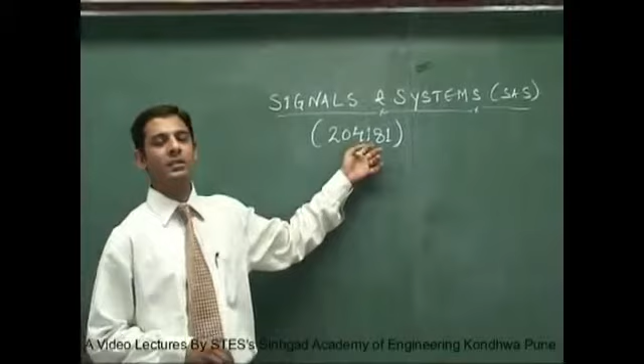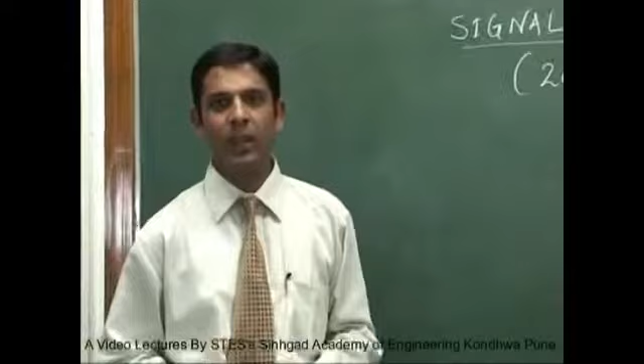This is one of the prominent subjects of second year engineering at Pune University, especially for the Electronics and Telecommunication branch. As you might know, the subject carries 100 marks, and at the end of the semester there is an oral exam worth 50 marks. So altogether the weight of the subject is around 150 marks.

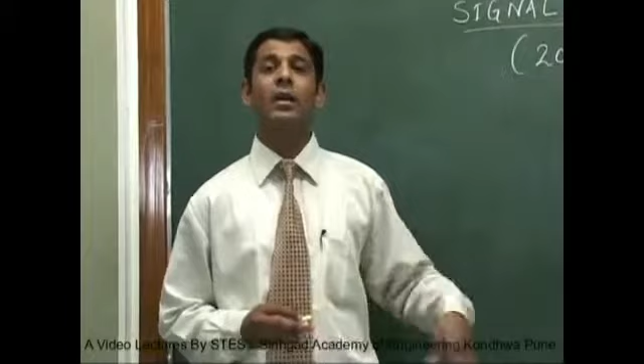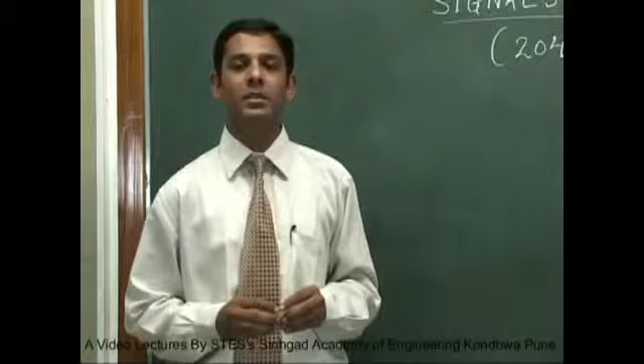This forms one of the very core subjects of electronics engineering because it involves all the concepts of electronics plus telecommunication engineering, where we deal with signals and how to process them. Subjects like Signals and Systems, Digital Signal Processing, Digital Communication, Advanced Digital Signal Processing and Image Processing are all in one queue, and for all these subjects, Signals and Systems forms the core basic subject.

As with every subject, this subject comprises 6 units, and I'll be discussing all these units in due course of time. Today I'll be providing you an overview of Unit 1, and since Unit 1 comprises around 4 chapters, we'll try to cover one chapter in brief.

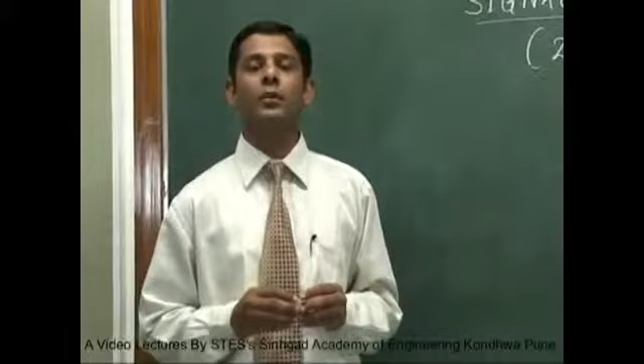Before starting, let me tell you some books which will be helpful for this subject. The first book is Signals and Systems by Simon Haykin, published by John Wiley. This is one of the Bible books for Signals and Systems. I mostly recommend this book to students, and almost 3 to 4 units of our syllabus are set from this book. You can always refer to this book, and most of the unsolved questions from it we'll try to solve in this video series. Mostly the question paper is also set from this book.

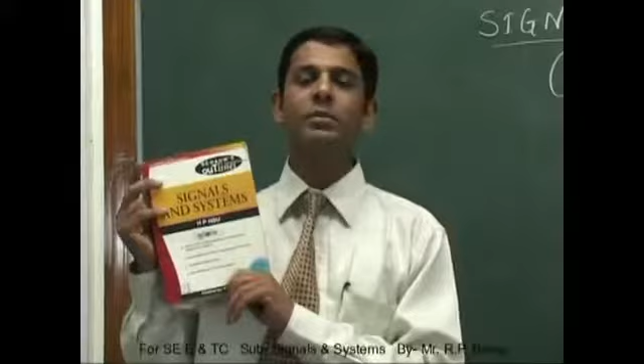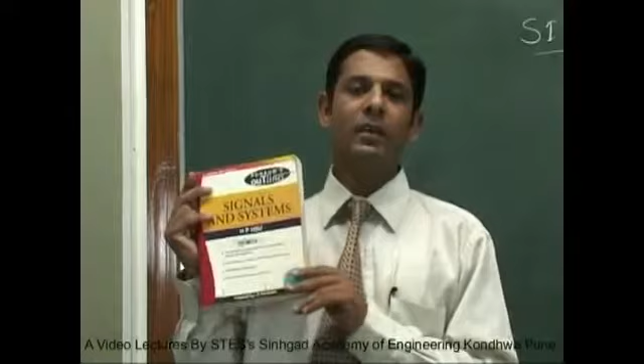Another book I'd recommend is Signals and Systems by M.J. Roberts, given by Tata McGraw-Hill, but I think it might be a little difficult for a normal student to digest. As an alternative, I'd suggest one more book, Signals and Systems by H.P. Hsu, from the Schaum's Series publications by McGraw-Hill. The importance of this book is that it has so many solved numericals widely required by second year engineering students to understand concepts, which they can practice, and which will be helpful in exams.

So 2 books will be very sufficient for the student: first, Signals and Systems by Simon Haykin, and second, Signals and Systems by H.P. Hsu from Schaum's Series. This Schaum's Series publication is very famous, not only for Signals and Systems but you'll find it even for other subjects like SSDC, DSP, or even Control Systems. For so many mathematical subjects, Schaum's Series is a title known not just for electronics engineering but for other branches of engineering too, dedicated to solving numericals for a particular subject.

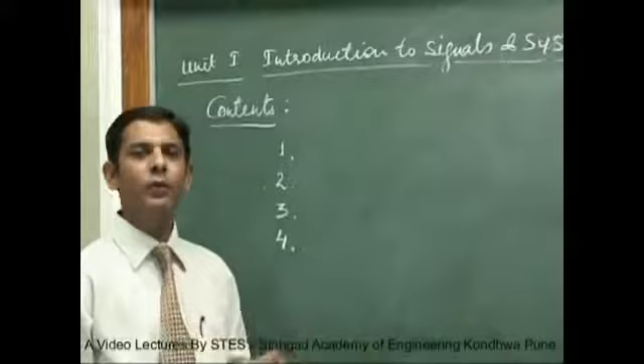As I was telling you, today we shall get an overview of Unit 1 and try to complete one of its chapters. The name of the first unit is Introduction to Signals and Systems, and it basically comprises 4 chapters.

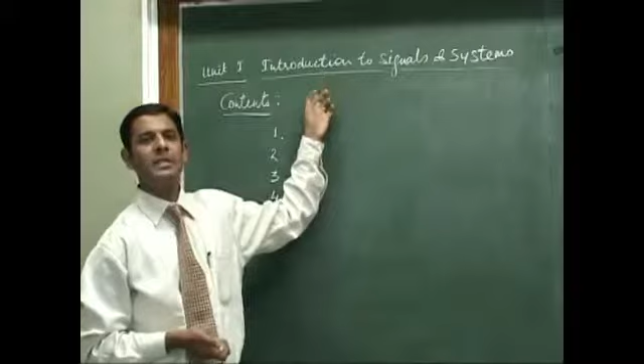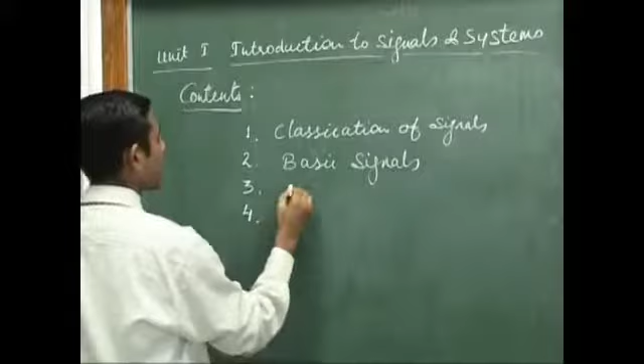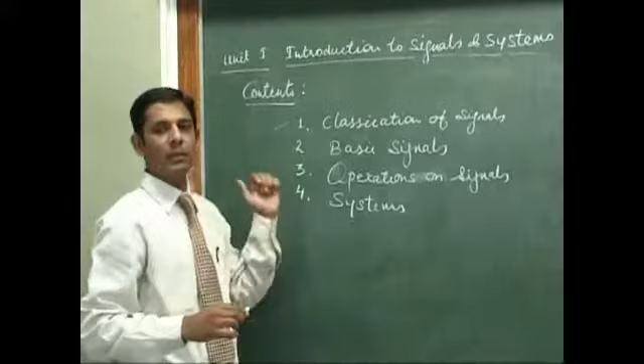So that will be the contents of Unit 1. What are the 4 chapters? Classification of signals, basic signals, operations on signals, and systems. Today I shall try to cover this chapter and give an overview of the other chapters also. Let me discuss each of these chapters in detail.

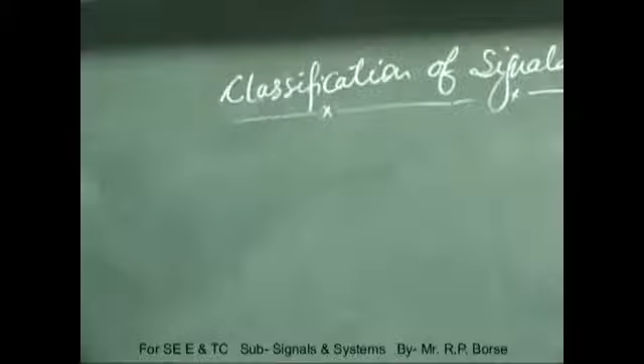So why is classification of signal most important? Because we want to know the characteristics of the signal. Many times the behavior of the signal depends upon its characteristics. So we are classifying different signals based on their characteristics, to know which signal fits into which category. That is the main motto of classifying signals.

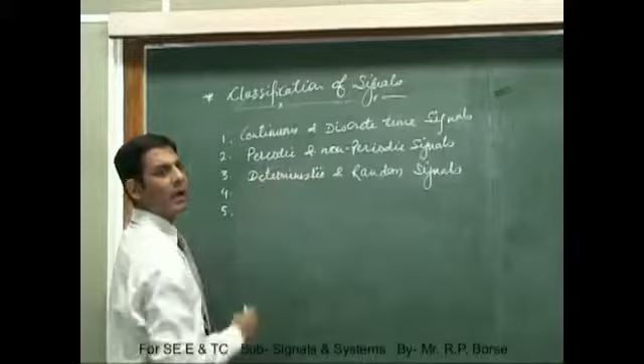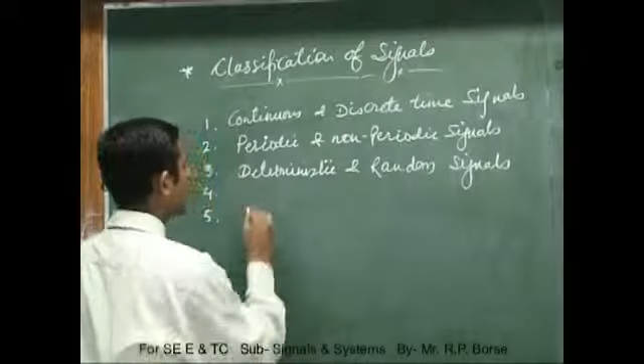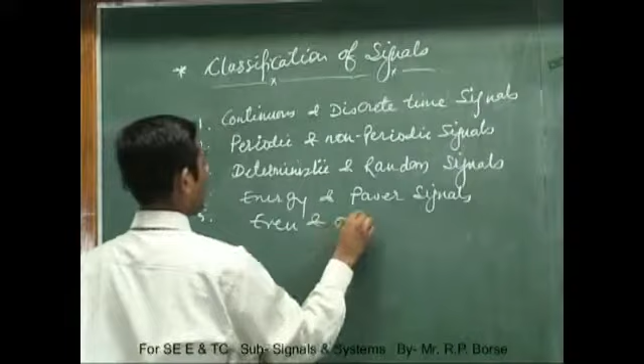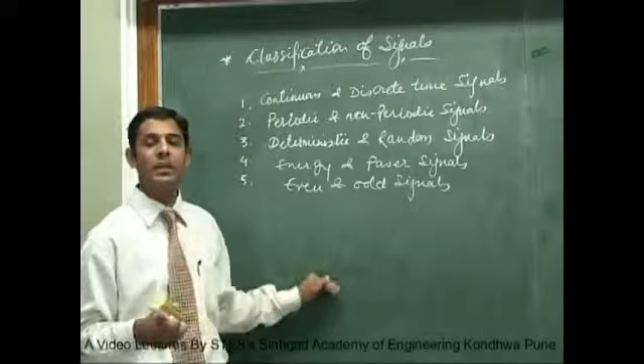We are classifying different signals under different heads, namely continuous and discrete time signals, periodic and non-periodic signals, deterministic and non-deterministic (also known as random signals), then energy and power signals, and even and odd signals. There can be innumerable classifications of signals, but at a primary level in second year engineering, we classify signals under these headings.

So let us take the first one, continuous and discrete time signals. As I told you, we will be discussing different chapters in Unit 1. The first chapter is classification of signals. Before we classify the signals, we should know what actually a signal is.

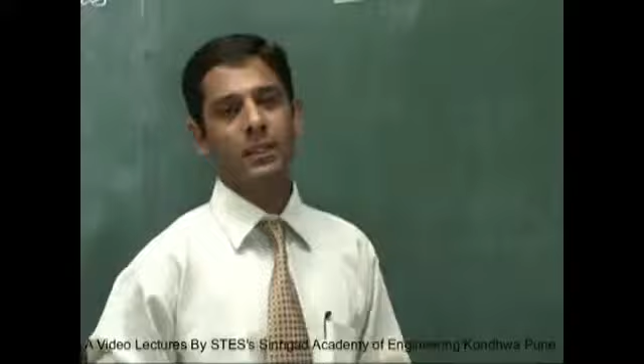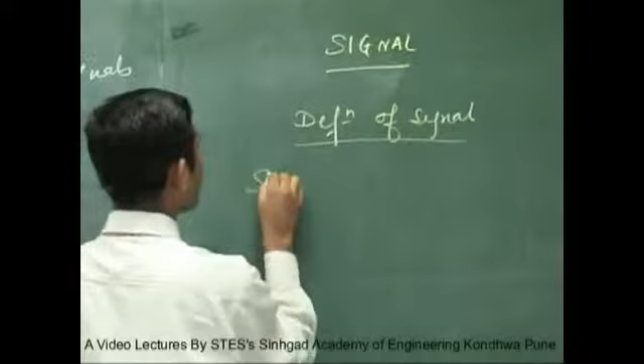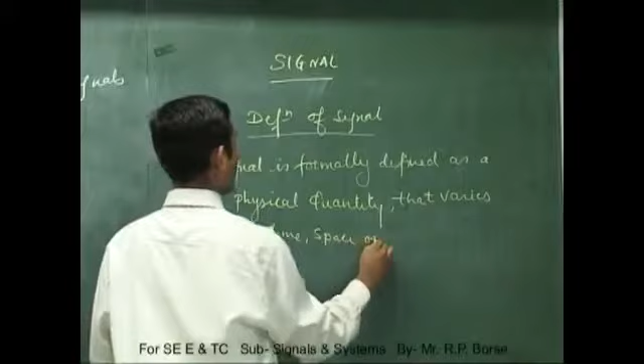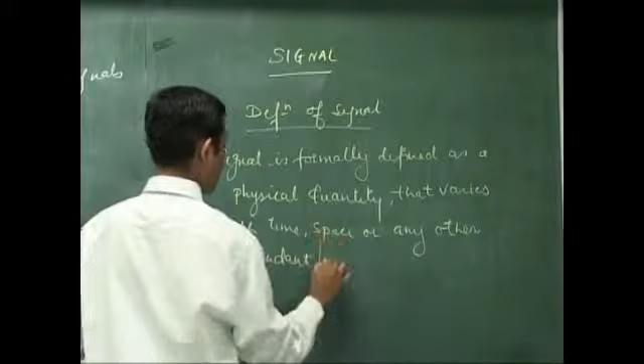Today we are going to see the definition of signal. How is a signal defined? I'll write down the definition. Signal is formally defined as a physical quantity that varies with time, space, or any other dependent or independent variables.

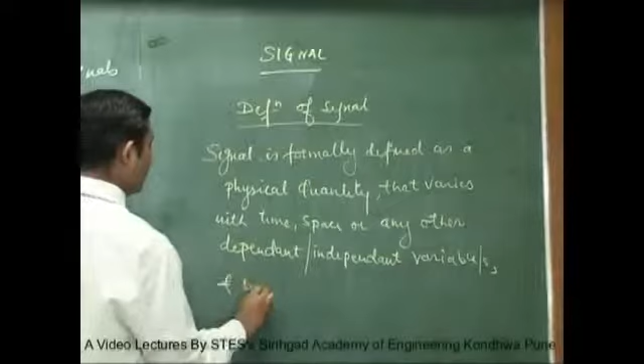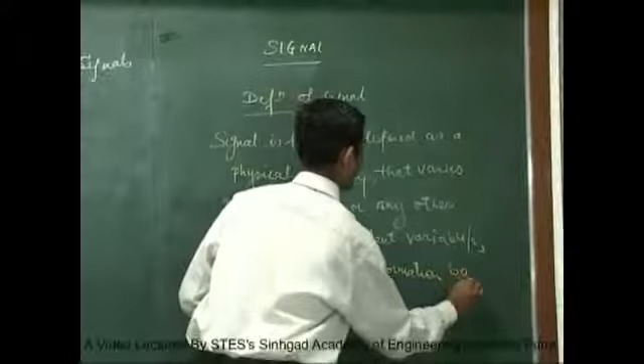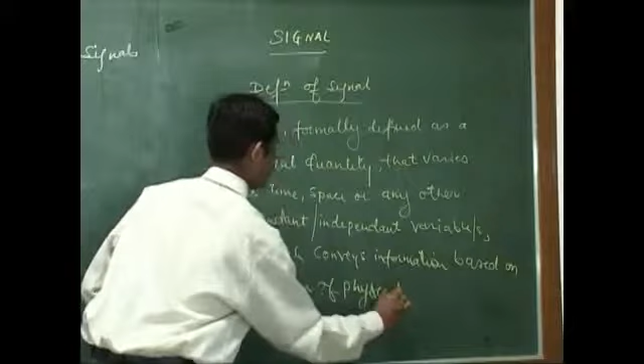And which conveys information based on the nature of physical phenomena. Now, in this whole definition of signal, two words are very important.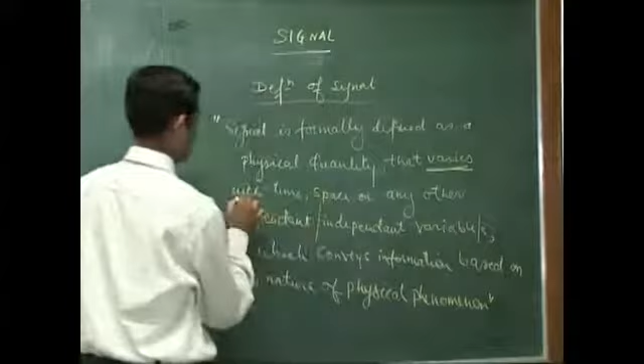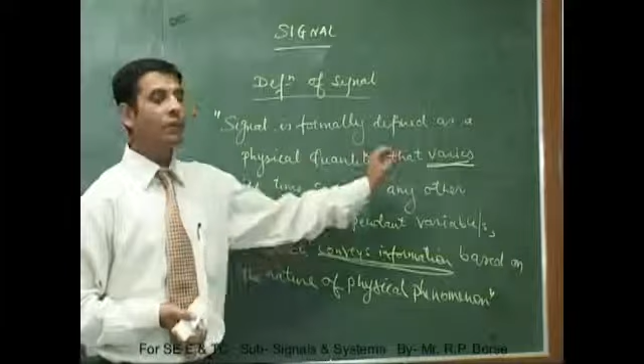What are these two words? Namely, 'varies with' and 'conveys information'. Now what is the importance of 'varies with'? Something which varies, it conveys information.

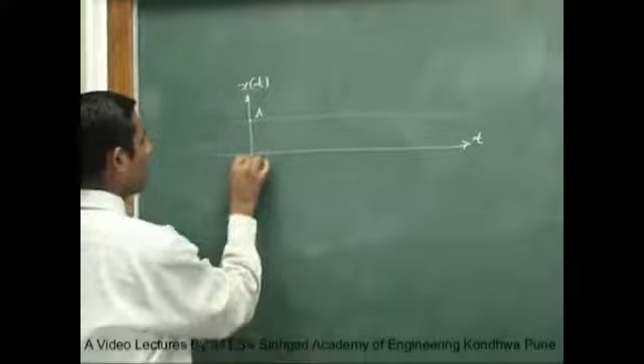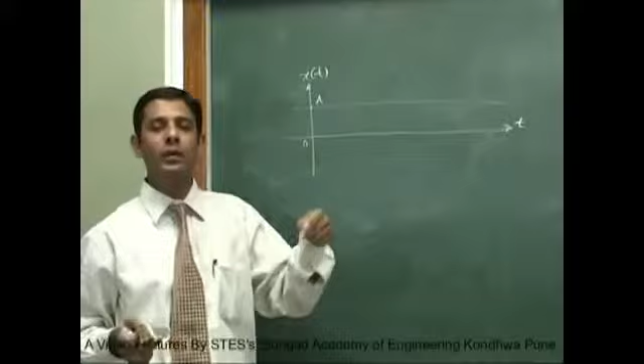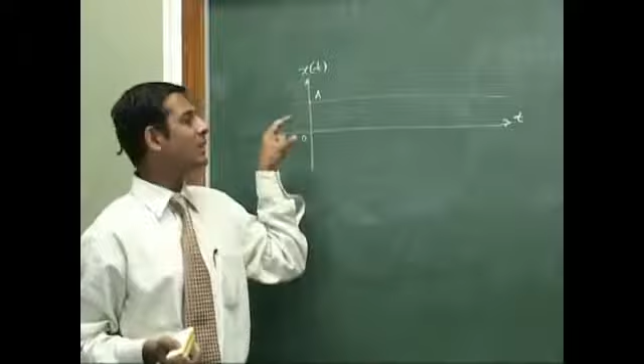For example, if you could see, what is this? Everyone can clearly say that this is a DC signal of some amplitude A. Actually, if you could see a DC signal and try to hear it through a loudspeaker, it's a very annoying noise. Now it doesn't convey any information because it is fixed, it is not varying with time.

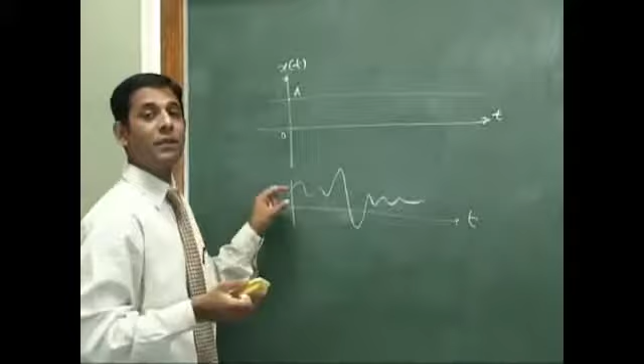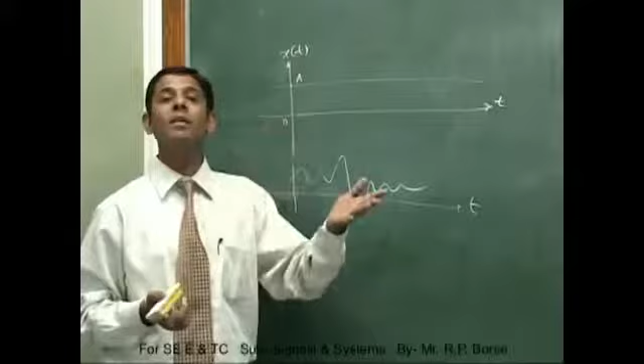Now to the same signal, if I put it in this way, with different amplitude, certainly it is conveying some information. Now whatever I am saying will have a nature something like this. But something which varies always conveys information. Something which is fixed, stagnant, doesn't convey information. So what we are trying to say in this definition of signal is that it varies.

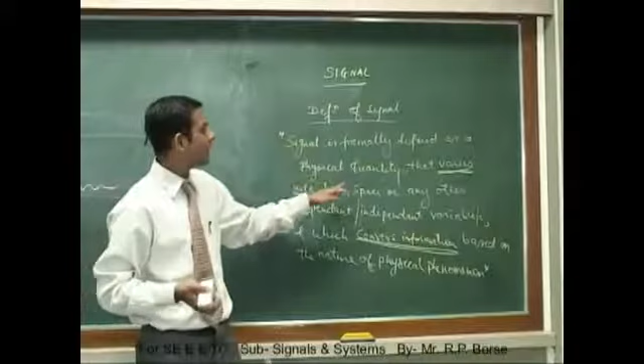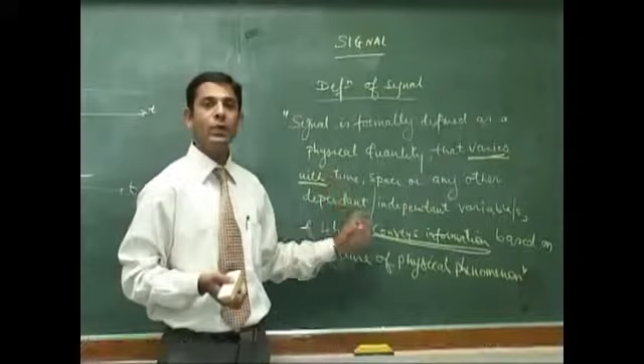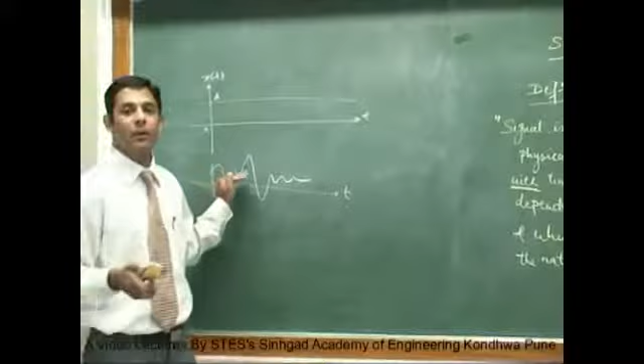The signal varies with time, space, or any other dependent or independent variables. Whenever it is going to vary, it is going to convey information. Just as I told you, in the first signal, since it is not varying, it is not conveying any information. And in the second case, wherein it was varying, it is conveying information. Now it is varying with time, so it is conveying information.